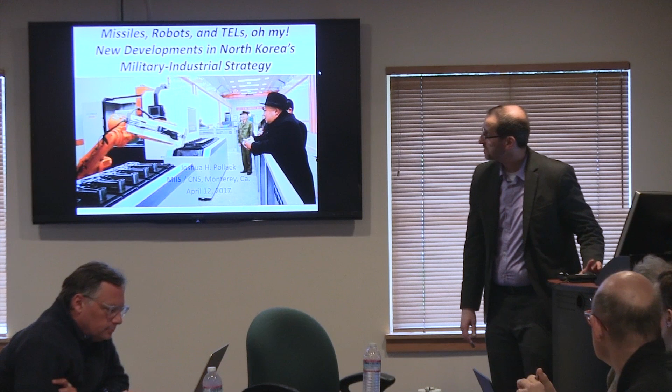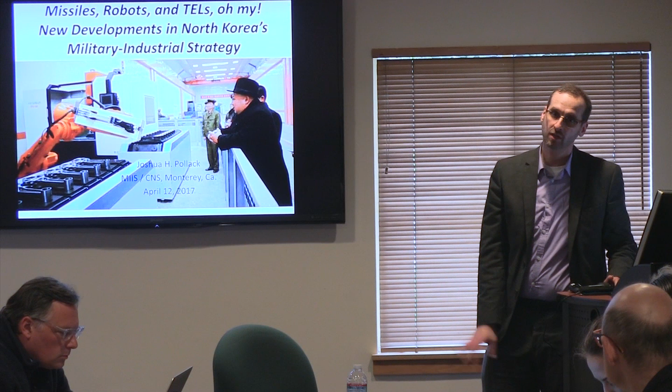Thanks for that, Robert. Yeah, there is some relationship between this presentation and the work I did with Robert, but we don't get into any additive manufacturing here because I don't think it has reached the point where it's incorporated into large-scale industrial processes in North Korea. Could be wrong, but it's just not there yet. They certainly are working on it, but that's a different story.

I last spoke here almost exactly two years ago on North Korean science and technology, on some of their industrial technology. So in many ways, this is an update. And at some point, I will have to pull those two talks together and turn them into an article.

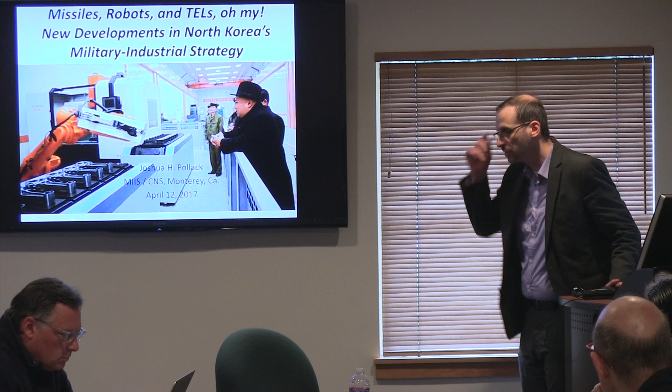But what I'd like to talk to you about specifically are things that have happened in the last couple of years, highlighted during leadership visits in North Korean propaganda and the like. You're seeing some of it here, and you will see how these three things—missiles, robots, and TELs—tie together by the end of the talk, I hope.

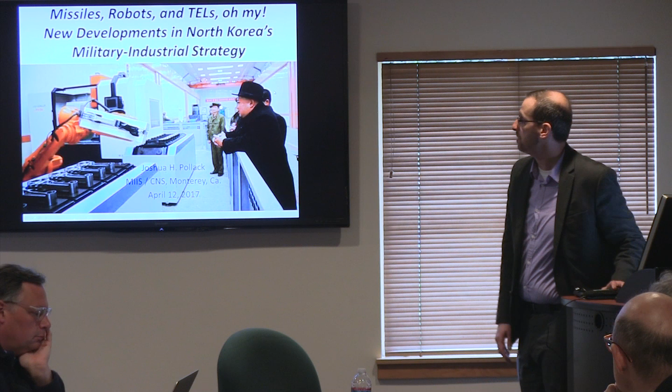One thing: when you look at this space, you'll notice a few things about it. There are no windows. This is underground, or it appears to be. Can't be absolutely sure, but you usually can tell. I'm not going to get into which officials were present, but at all of these visits, a high-ranking official from the Munitions Industries Department of the Korean Workers' Party tends to be present. When you see those two things in combination, it's a pretty good hint that what you're looking at is a military facility.

So with that, I'm going to talk about three things—more than three, but three large things. One is how the North Koreans have been talking about science and technology and how that has changed. Two is what are the trends of late, moving from CNC, which is computer numeric controlled machine tools, to FMS, flexible manufacturing systems, which is an umbrella term that includes CNC and potentially a lot of other things. And then tying it together with their defense needs—how you can see this fits into their military strategy at the moment.

So let's start with ideology. If you follow North Korea at all, you've heard of the Juche ideology, or Juche Sasang, as they call it. This is an idea that developed in the late 50s and early 60s, and basically it means autonomy. Although they don't like to translate it—they say it's untranslatable and they use the word juche—they break it down into three major categories: political, economic, and the defense industry. Self-reliant defense, make your own stuff, and that's what I'm going to focus on here.

Under Kim Jong-il, the second ruler of the country, Juche was, well, not de-emphasized, but elaborated into something called Songun Jeongchi, military-first politics. The way they expressed it was that the military was the main pillar of building a powerful state. They really presented that in a fully-fledged manner in late '98 after their first space launch, and early '99. Within a year, they had really begun to play out the science and technology aspects of it. So ideology, the gun barrel, and science and technology are the three pillars in the construction of a powerful state.

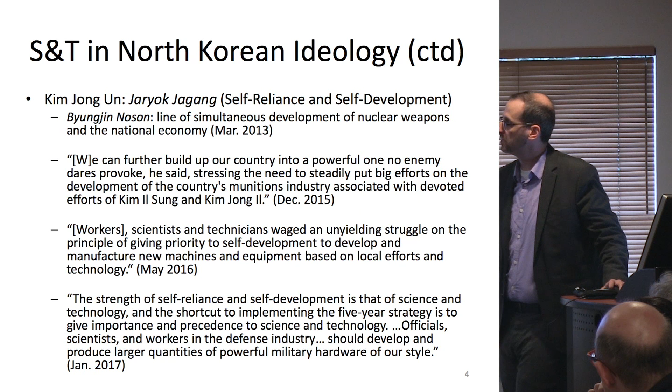So let's talk about automation, because this is a big deal. They often talk about the need to save labor and how skilled labor is a bottleneck on the production floor. It seems that they have troubles training machinists in adequate numbers. I don't know why, but that's a point that they bring up again and again.

So for many years, they've been talking about automation of industry. And this reached a new peak in 2009 during the transition to the new leadership, when they started to make CNC machine tools, that's digitally controlled machine tools, very prominent. Essentially, it is a regular machine tool, but it is computer controlled. So you can program it instead of having to guide it by hand.

And they already had invested a lot in mathematics and computer science, so I don't think the software development tasks were out of reach for them. And even by the time they started promoting this, making it something they would put into rallies, they had song and dance numbers dedicated to CNC, shown on television. It was already a common sight when the leaders would tour industrial facilities - you would see these machines.

Now, what's new is in the last few years, they've begun very extensive renovations of their defense industry. You can see this in Google Earth, you can see it in Planet Labs. I'm not going to show you any of those images. I'm going to show you stuff from inside the buildings, but you can go look. The footprint of these plants is just growing rapidly in the last few years.

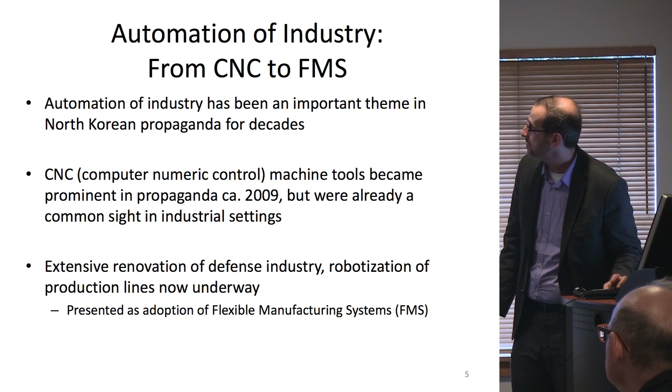So, just for starters, this is a random image plucked off the web. This is a North Korean-made machine tool. They have two major concerns in North Korea that make CNC machine tools.

Ryonha is the big one. It's a joint venture. We don't know who the joint venture partner is - they've never spelled that out. A lot of us suspect it's probably a Chinese firm. If you look at the latest UN Panel of Experts report, they actually link some designs of machines produced at the major Ryonha facility to designs produced by one Chinese company in particular.

It was a comparison of three machines. You could see a family resemblance. They're not identical, but this is typically what they look at. You see CNC right there, and it's got a designation. This is the CNC control panel.

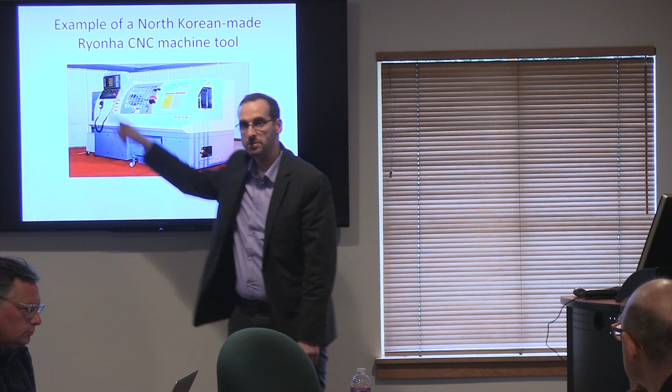Chances are pretty good that's imported from somewhere. When you get a good high-res image, you can sometimes see the logo of the manufacturer, and it tends to be either Chinese or German, but you can't always see that. So it appears that they make these, and they just install that sucker, which they imported. I'm certain they aspire to make their own, but for now they don't seem to have any trouble getting them.

The other way you can recognize it, besides the paint scheme with the blue base, is the body style. This slight curvature in front is pretty typical of Ryonha designs. The window on the side, so you can peer in, is also very typical of how they make things.

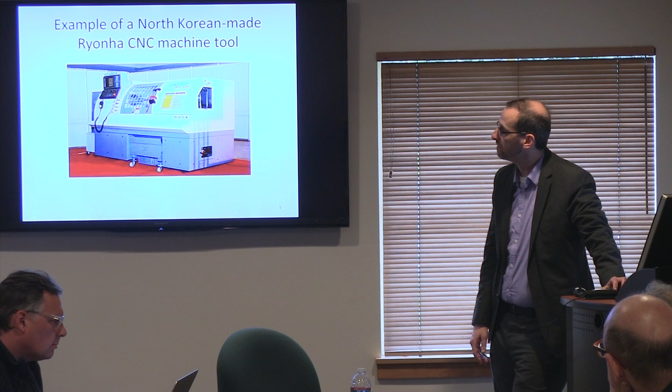Josh, is this particular machine tool a lathe? I think it is, but I'm not sure. I think it's a lathe. There are lathes, grinders, mills, and some of them are pretty recognizable. I'd have to look this one up, but I think that is a 5-axis lathe. I just plucked it off the web at random.

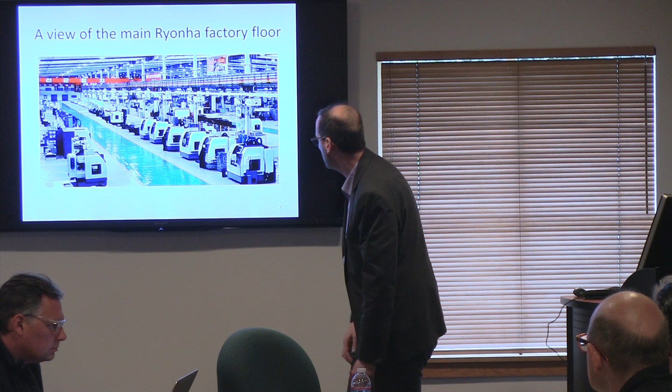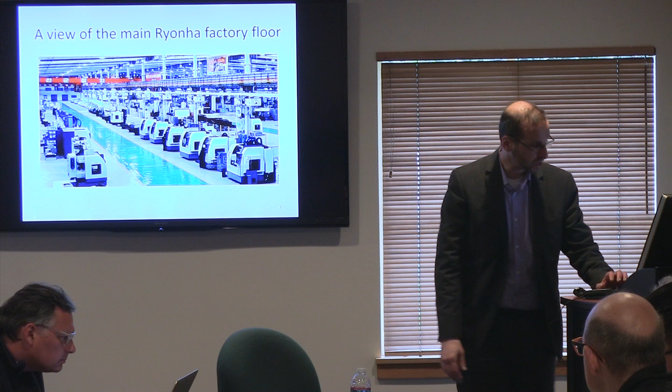Josh, is this from an advertising? Yeah, I just got this off the web. This is from Uriminzokkiri website, which is a website run out of China by North Korea. So this is sales, this is marketing. They do export these, although it is forbidden under UN resolutions. But this is a rather large factory. This was renovated, I think, around 2009, 2010, 2008, something like that.

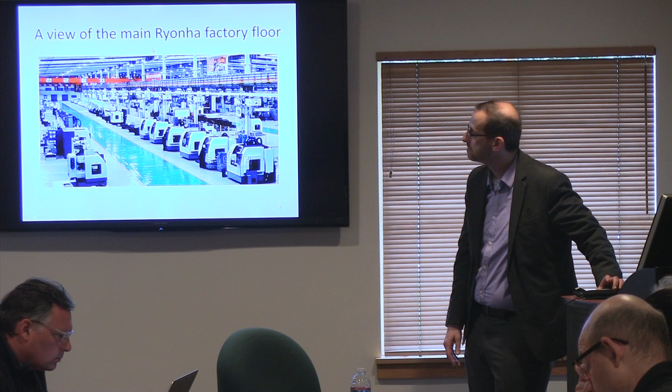Now, here's one that I'm pretty sure is not made in North Korea. This is something from the Kanggye General Tractor Plant, where they don't make any tractors, and to the best of my knowledge, never have. It's the largest munitions factory in North Korea. It's underground, which again is a good hint that it's military.

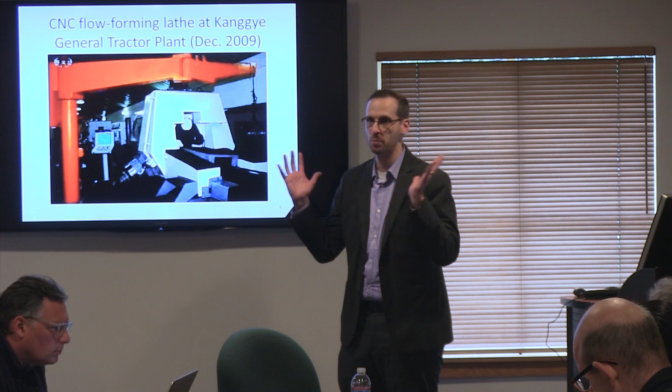It's very hard often to tell these machines apart. They're boxes. If you look at the logos and the designation painted on it, you can look up what the marketing materials say. This one you don't need to - this is very recognizable if you spend enough time looking at these things. This is a flow-forming lathe.

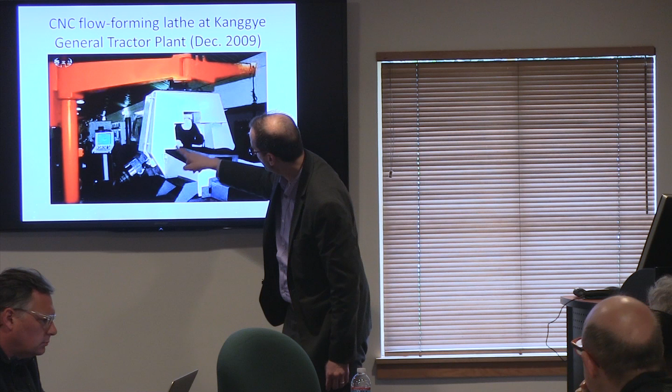The reason you can recognize it is this carriage here. That's the key piece. It has this piece of hydraulics here, another one here, and another one that you can't see there. These are roller positioners - those white things are the rollers, and they go in and out to squeeze a tube or other similar shape. That's not the tube, that actually is the mandrel that the tube fits over. This is an example of the tube, the workpiece.

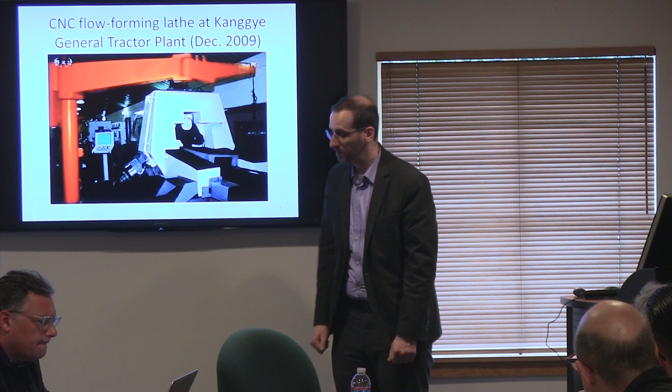These are used for elongating, hardening aluminum or steel, typically. There are other applications as well, a variety of civilian applications, but I don't think this is one of them. The two most important applications from a non-proliferation standpoint are making rotors for gas centrifuges and making rocket motor casings for solid fuel missiles. Which of those this is, or maybe neither, I don't know, but that's what it looks like, and it doesn't look like a North Korean machine tool in particular.

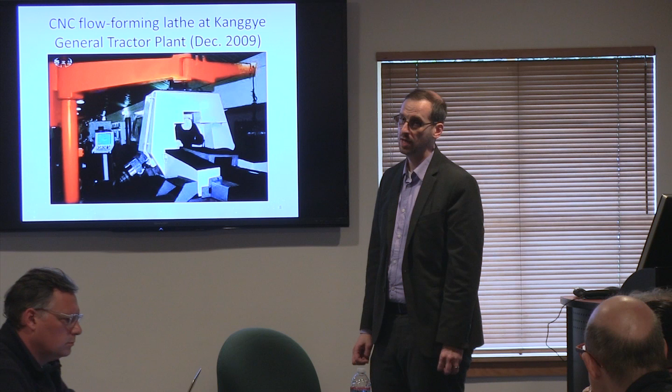It actually may be a German manufacturer, it's hard to tell. But I've looked through a lot of these photos over the years and I've identified 8 or 9 different flow-forming lathes in North Korea. One of them at the Kusong factory, which is Ryongha's big competitor, did have the styling of a Kusong machine and had no CNC control, so it looked like it was an early prototype. But nothing else ever looked like it again.

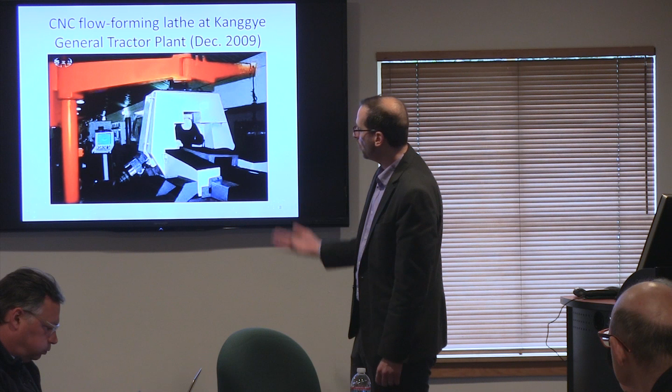They all look different. Some of them have resemblances to foreign machines - this one, as I said, looks sort of German. Their patent literature, you can see that they sometimes patent a particular piece of the machine, which suggests that they were probably upgrading it or refitting it in some fashion. But these things have been a real hodgepodge over the years, until last year.

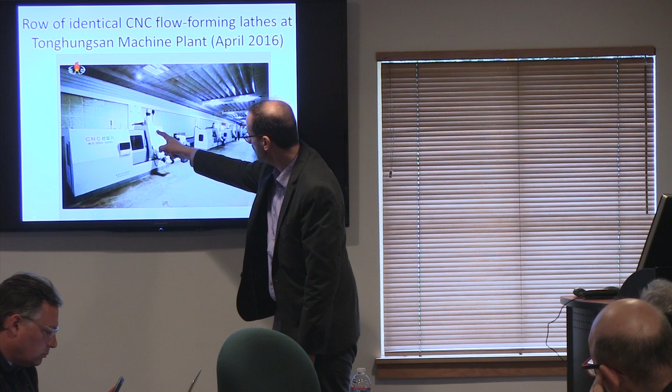You have half a dozen identical flow-forming machines in the Ryongha style. You can see it's the Ryongha coloring and body type, with the triangular carriage and the roller positioner there and there. You just can't miss it. Some of these machines can be hard to identify, but this ain't one. Those are flow-forming machines. There's also a high-res image where you can see that little plaque.

It is an award for a machine for high-rate production. These were shown off to the world in this underground facility in April 2016, on the same day that Kim Jong-un seems to have observed flight tests of new solid fuel surface-to-air missiles for advanced air defenses, very similar to the S-300.

We saw this, and what that award tells you is these things have been churning out their product already for a while. That is the famous lathe number 29 award, by the way, Jeffrey. So you got a good solid half dozen of those.

That's quite a statement. I don't know how many flow-forming machines there are in American industry, but wow, do they love them in North Korea. You can't sneeze without knocking into one practically when you start looking through these images, once you know what you're looking for.

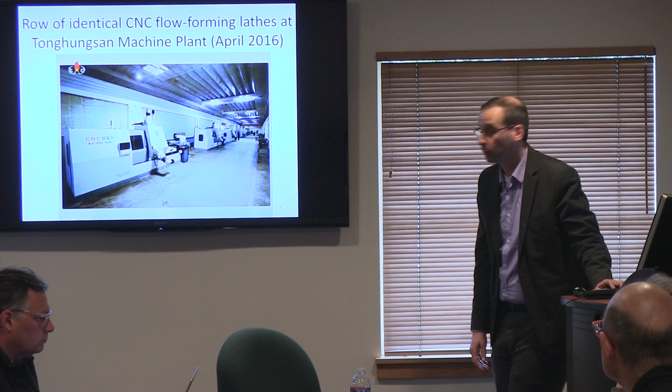So that suggests that they may have moved to a fairly high rate production of solid fuel missiles. That's a good clue. Can't be sure that's what the application is, but it would make sense. It is in a military setting, underground, you can see that from the officials who are present, and maybe the coincidence of timing with the SAM test was not a coincidence, hard to say.

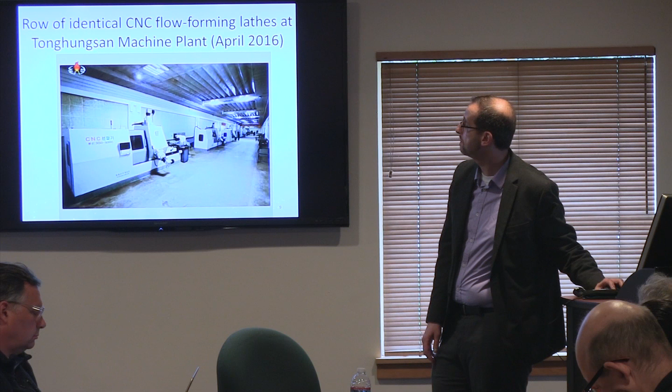A few months before that, Kim Jong-un visited the 18 January General Machinery Factory, and that is the first time I've noticed that he started talking about flexible manufacturing systems. This became a model facility that they cite all the time, and they show off, saying this is what we're striving for here in North Korea.

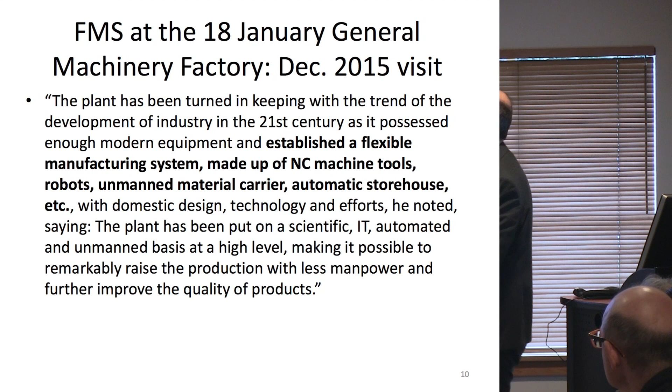NC, which means CNC, machine tools, robots, unmanned material carrier, automatic storehouse, et cetera, making it possible to remarkably raise the production with less manpower - remember that bit - and further improve the quality of the products.

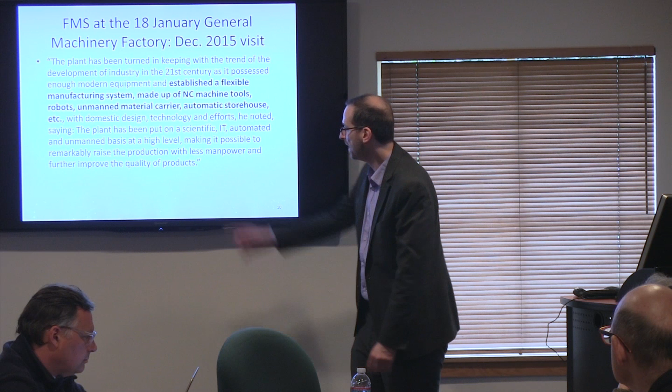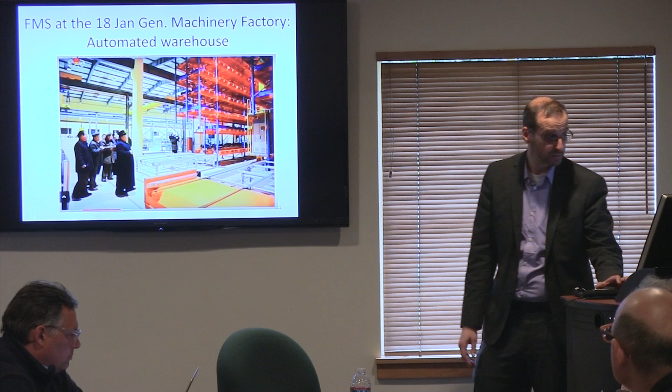So let's see a few of the pictures. This is the automated warehouse, a robotic warehouse with huge overhead racks where stuff is moved and stored. They didn't say what's being made there, but we will see what's being made there. It actually is evident.

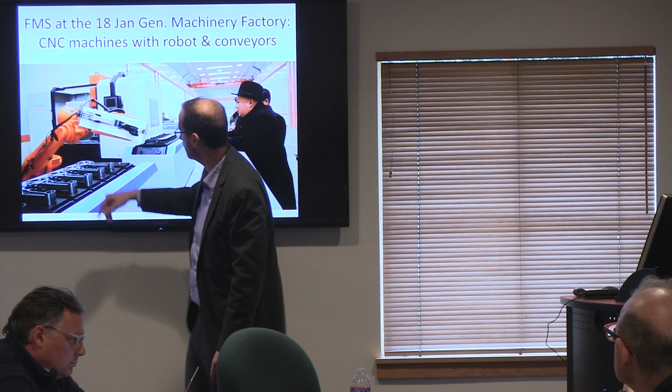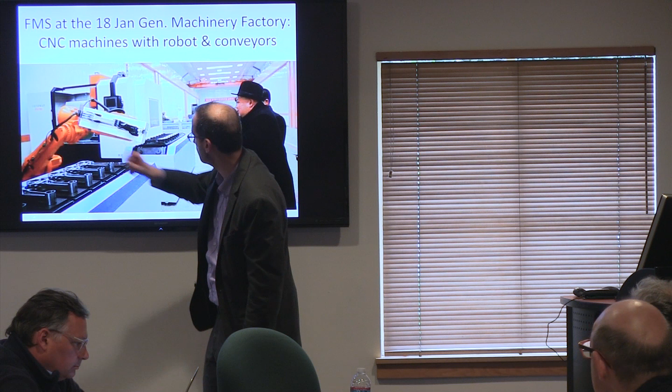Here is a Ryonha style machine tool, which you saw earlier, and a robot to handle the products coming off the machines. There's another identical one right here, just before the foreground. So the robot is turning this way and that, servicing them both, moving their products onto these conveyors.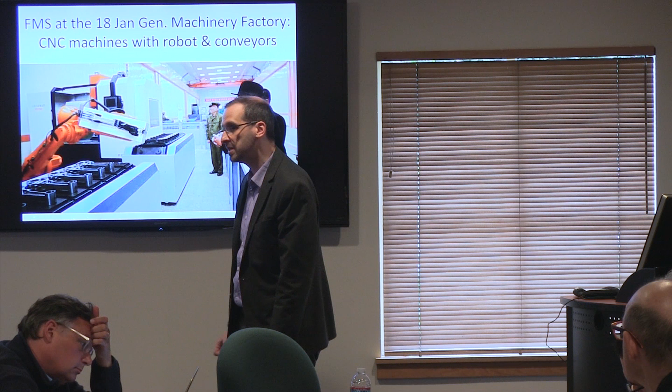They do a lot of robotics research in North Korea, but judging by what they've exhibited, it's fairly basic, and this thing is not one of theirs. Where did it come from?

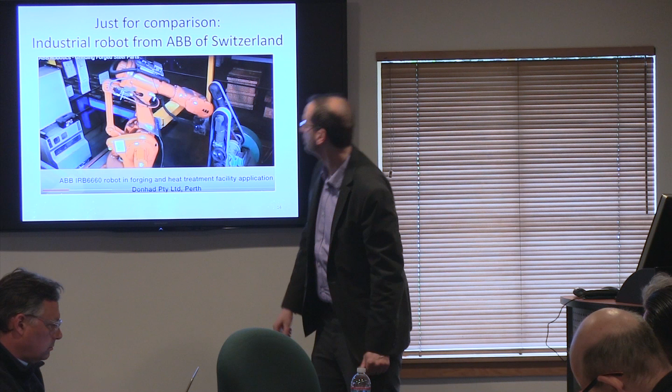Well, here's another view of the same thing. See the letters upside down? ABB - that's a Swiss firm, a nice website. Here's one of their machines in Australia on a production line doing something fairly similar, at a forging heat treatment plant in Perth, Australia. Pretty similar machine. They have a whole wide variety of robots like that.

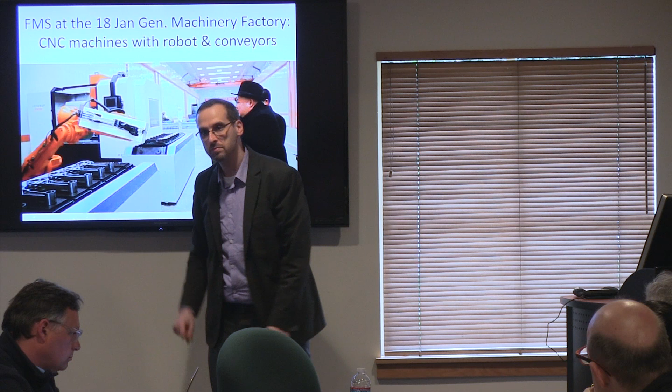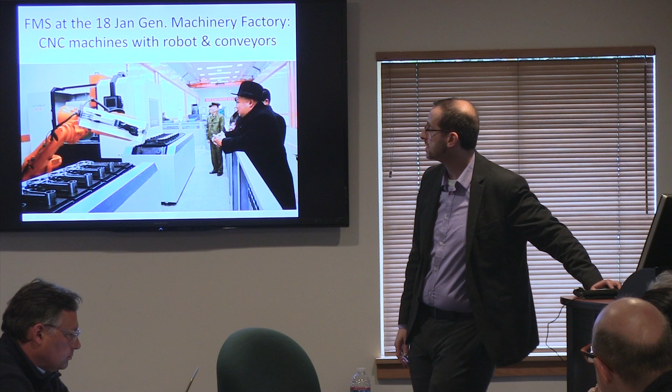So it seems that what they're doing is combining their own machines, parts of which are probably imported, with entirely imported machines to create this new production line. So they're both circumventing sanctions by developing their own stuff and beating it directly by getting their hands on foreign origin stuff. The strategy they're using for overcoming sanctions is very much a hybrid strategy right now, and is moving more and more towards an indigenous route.

Josh, so what - I mean, if you don't mind interruptions during the presentation here - so here you clearly identified a Swiss item. So what are the repercussions for Switzerland of what would appear to be, at least what to me appears to be, a violation of the UN sanctions?

That's a good question. I'm going to have to go back and see if the UN panel of experts report picked up on this, when they highlight things, Melissa? It's also really common for these types of products to be resold.

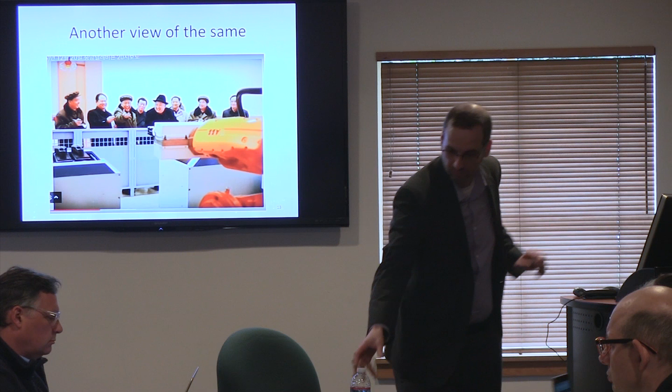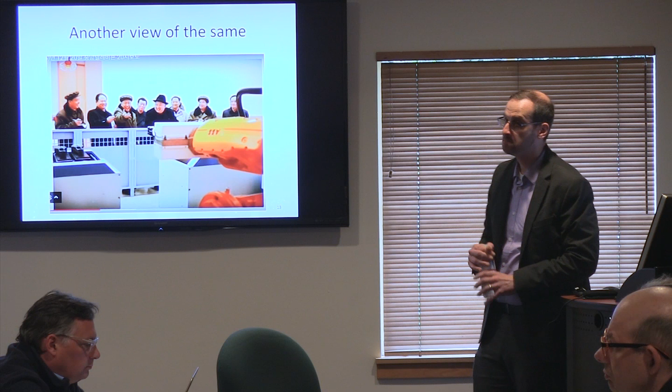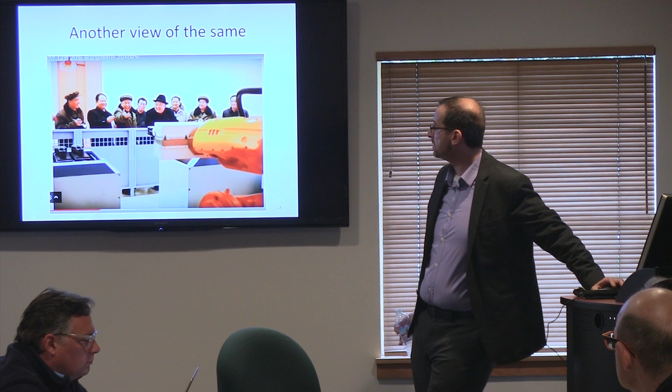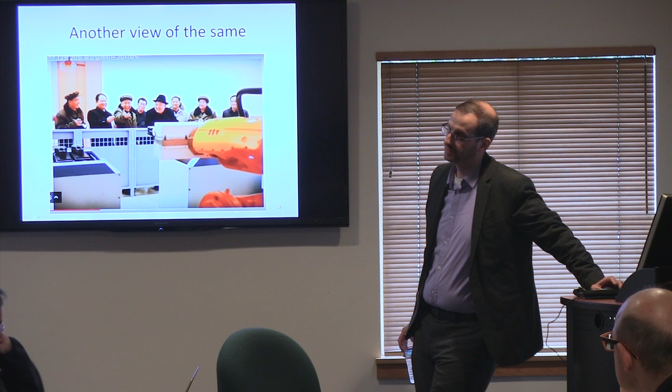So the license should have transferred to whoever Switzerland sold it to, but then some company goes out of business, they sell their used equipment, and North Korea's been really good at picking up this reselling of used equipment. But the first recourse would seem to be to go to the Swiss. I'm curious whether there are any activities pursued on that. I mean, there should be, certainly. This is out in public, people have commented on it. The awareness of people reselling is much lower than the Swiss company who manufactured it, who probably had some sort of internal compliance program.

Let's move on to the final part of the presentation: meeting defense needs. This is February 12th, 2017.

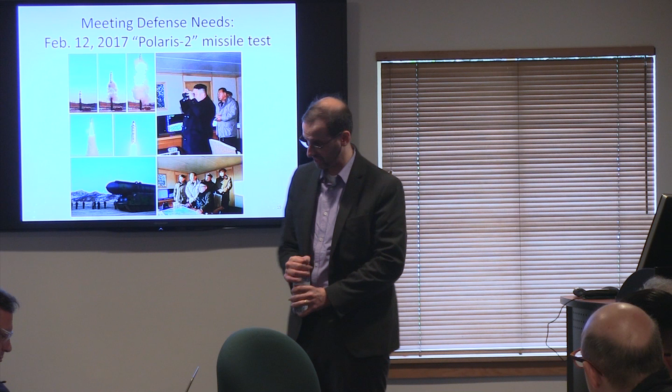Here we see a large diameter, two-stage solid fuel missile launching off a transporter erector launcher, which looks nothing like we've seen before, except it has some resemblance to a North Korean-made tank. It turns out the test area is quite close to their main tank factory — in fact, it is a tryout facility for new tanks.

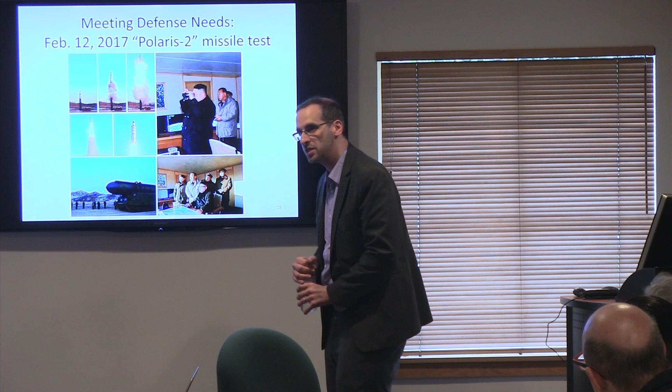So they seem to have applied their own local technology for the chassis. While certain features of the TEL are recognizably Soviet in inspiration — which is where they bought these things in the past, from factories around Minsk in Belarus, where real TELs have been made for some time — this is the first tracked TEL I think I've seen.

So they seem to have evaded sanctions by just doing it themselves, their own way. That doesn't mean they wouldn't prefer Belarusian TELs — in fact their foreign minister visited a whole bunch of those factories in Minsk a couple of years ago. And as we know, they also imported some TEL chassis from the Chinese before that. So as they've been progressively cut off, they've doubled down on their strategy of doing it themselves, and this is the first iteration of that.

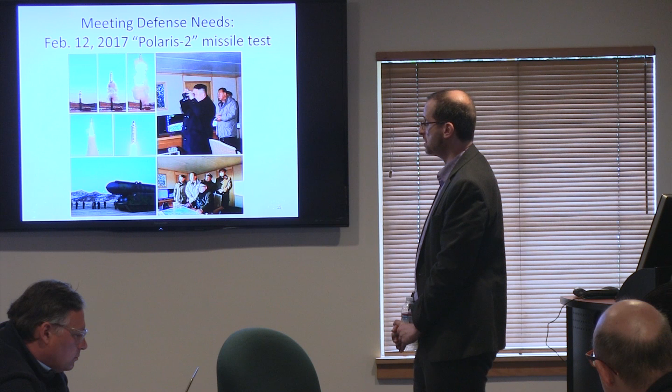Will they get to wheeled TELs eventually? They might — maybe they see some advantage in having tank treads on the thing, but I think their preference is probably for wheels on balance. We need to stay curious.

Here's a partial chronology of those two events we saw before. December 2015 is the first tour of the renovated 18 January plant, where flexible manufacturing systems are discussed and shown off. March was the static test of the solid fuel rocket motor stage, where they took the engine of that solid fuel missile and tested it on the ground and showed pictures. Then April 2016, the Tonghungsan plant, where we saw those flow-forming machines and the solid fuel SAMs, the S-300 clones.

August 2016, they tested that new missile off a submarine, and also did the second tour of the plant — I don't recall which was which, I didn't look up the exact date. So we saw even more details of the plant again that summer.

October, two unidentified missiles were tested at the Panghyon Air Base near Kusong. They blew up, and we all did a lot of interesting work on that. Some of the folks here used the near-infrared band of Planet Labs imagery to identify the burn scars on runways, and I had the pleasure of showing it off on CNN. That was a lot of fun, even though I had nothing to do with that.

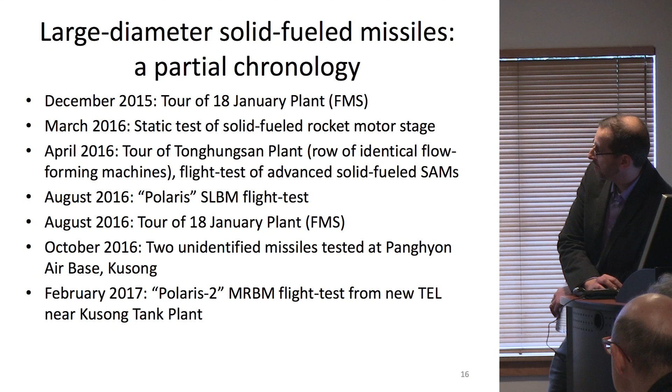The Strategic Command press releases said these missiles were presumed to be Musudan missiles, which are liquid fueled — that tells you they don't really know. They had a reason for guessing that, but they weren't sure. So I think they may have been solid. And then February 2017, of course, is what we just saw in the previous pictures, which is the land-based version, even closer to the Kusong tank plant, just down the road from Panghyon Air Base.

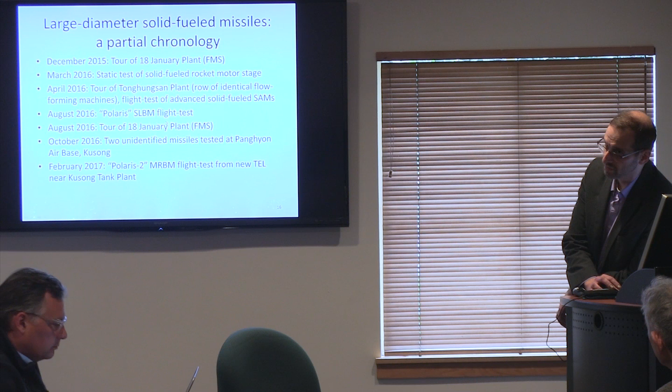So these things seem to be interleaved chronologically. And I now submit to you that while we don't know about the Tonghungsan plant — that may be about missiles, not sure — the 18 January plant, I'm reasonably confident I know what they're building there: it's the engine for the TEL.

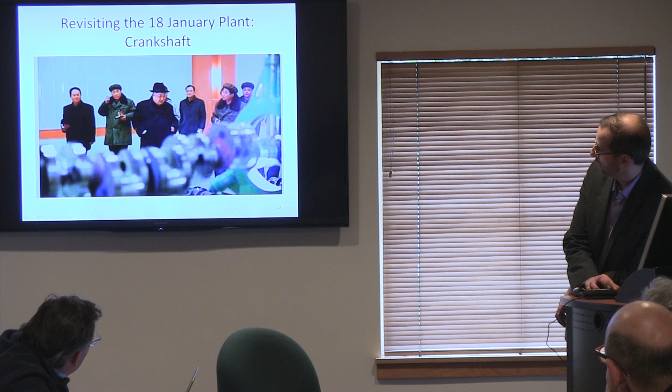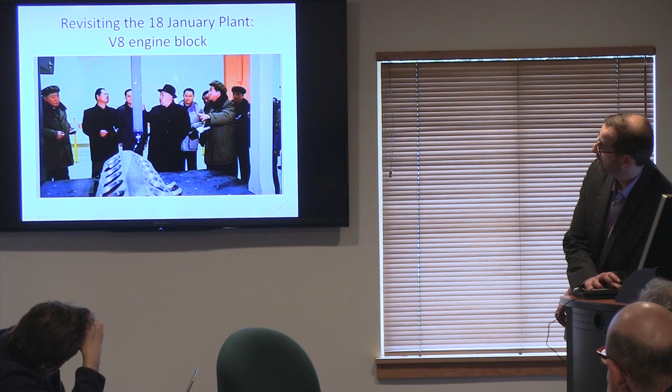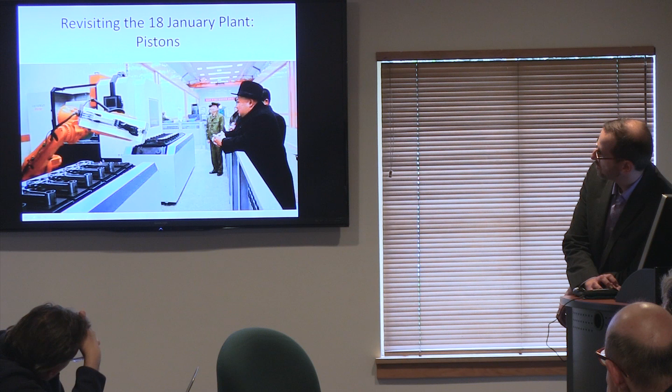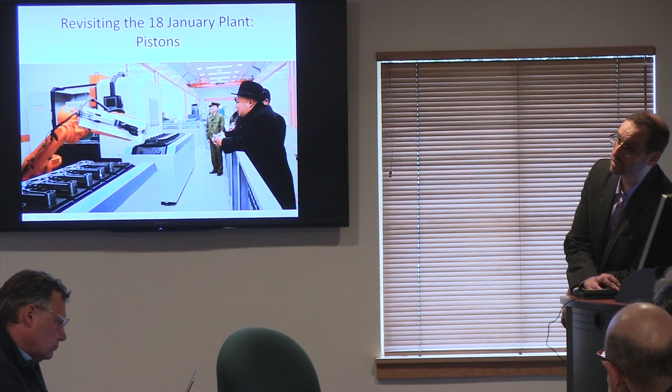So it took a while to figure that out, but they seem to have a complete underground military factory for heavy diesel engines that the leader was touring just before they rolled out the new TEL.